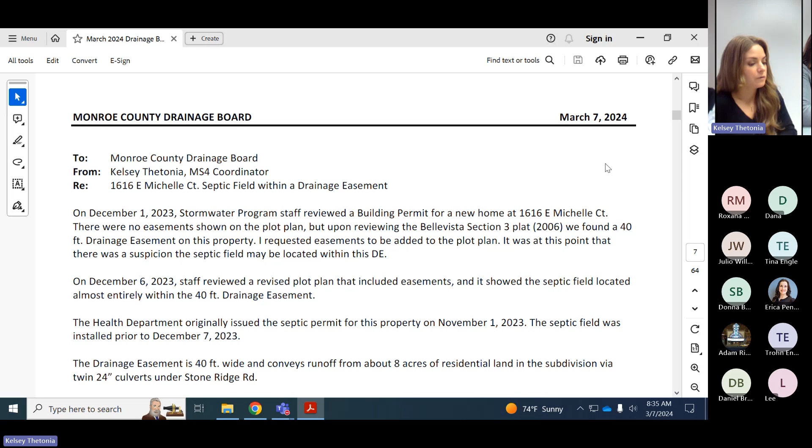So we had to figure out what to do with this septic field and the drainage easement. Obviously we don't want surface water flowing over your septic field in order to protect it and for its longevity. The way that I want to look at this is for the drainage board to allow the septic field to remain, pending approval from the health department, to make sure that they're okay with it. And we would move that drainage easement just south to the property boundary.

Okay, go ahead and pull it up. Yeah, well, it's here, I have some pictures I'll show in a second. Basically, we're going to be just shifting the drainage easement to work with the land here.

So it doesn't drain a huge area, about 8 or so acres. It's a big hill across the street here with just one other residence uphill from here. We also have drainage from the north as well, a bit more residential area draining to this. We have two 24-inch corrugated plastic pipes going under Stone Ridge Road, as well as two 12-inch culverts from Michelle Court to the north. They all meet in this area, and the surface water flows from east to west here.

So I believe when they installed the septic field, there's kind of a flow path that goes outside the easement area to the south here. So again, the 40-foot drainage easement was delineated with the plat, I think assuming the lot would be mass graded or something like that. But if we can move that drainage easement boundary farther south to cover this flow path here, the septic field itself, to me, doesn't look like it poses a huge obstruction. It's more for the longevity of the septic field.

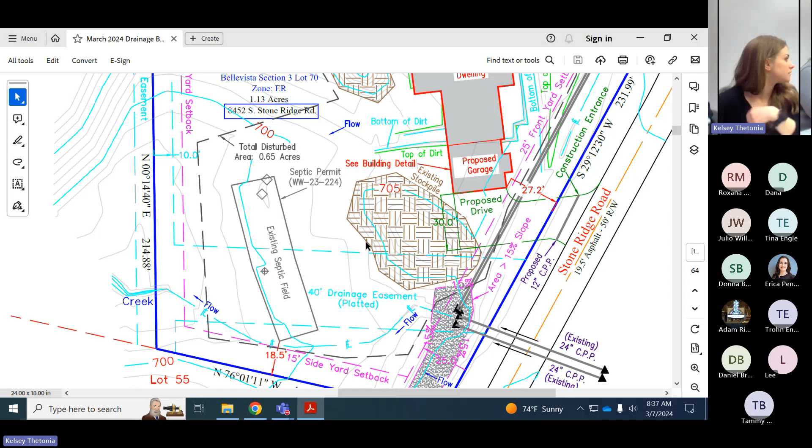Yeah, so it is accurate. They had Deckard Land Surveying complete the topo so that we could determine the distance between the septic field and the property boundary and see if we had enough space to convey surface flow. They had proposed potentially encapsulating this ditch in order to get it around the septic field. But it's tricky because we have two sets of twin culverts to connect, and it would be tricky -- build a box around it. It would be a very big box.

And just with the easement, just south of that -- would a portion of it still cover that septic field? It would still cover the septic field. I would envision just extending this line to the property boundary, so we cover this whole area in the easement. So the septic field would exist in the easement, that's what I'm looking for your permission for. Okay, gotcha, you're not moving that northern boundary down necessarily. Mostly because we only have 18.5 feet between the corner of the septic field and the property boundary, and that's not sufficient according to how we would normally size an easement.

You've got pipes routing over to that ditch -- four of them, yes. So this is what it looks like, these two 24-inch pipes. They're not exactly close together either, so if you were to encapsulate it, it would be a very large box.

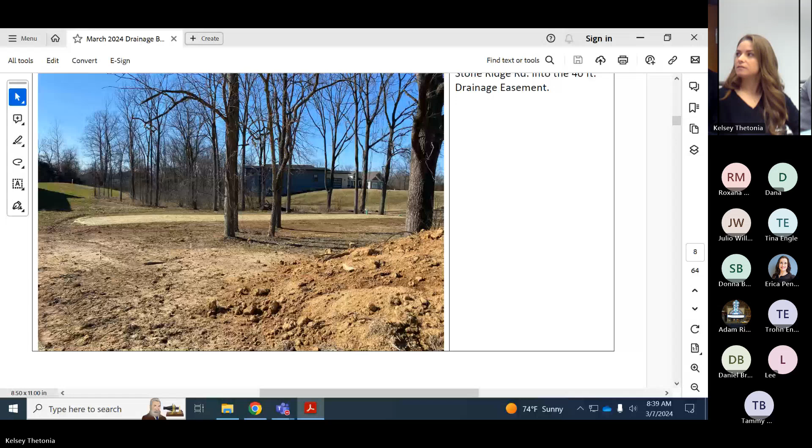Did the fellow dig that ditch already? There's a little bit of a swale, it's very minimal, but you can see the water is going around the septic field to the left here, flowing to this wooded area this way. And this stockpile will actually be moved as well.

So the home was just recently built, or there is no home? They're waiting on their building permit. Okay, because I'm looking at an area with no structure.

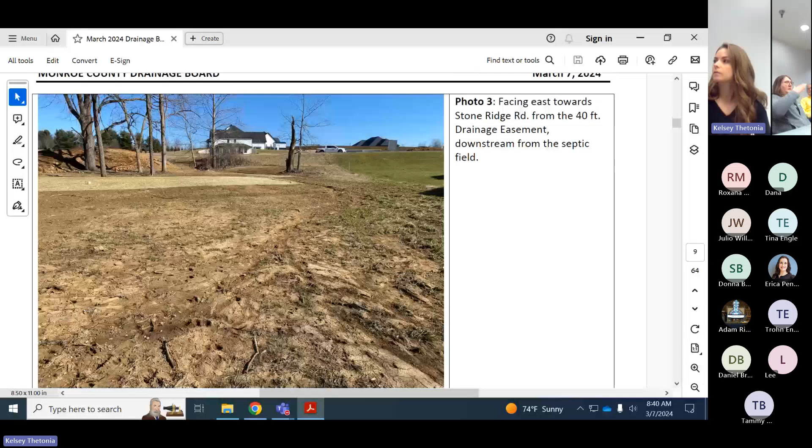Yep, I will highlight. It's not actually on the septic field, it's about 10 feet out, but it would be -- I can get that for you, basically like this. And then there'd be some drainage outlets.

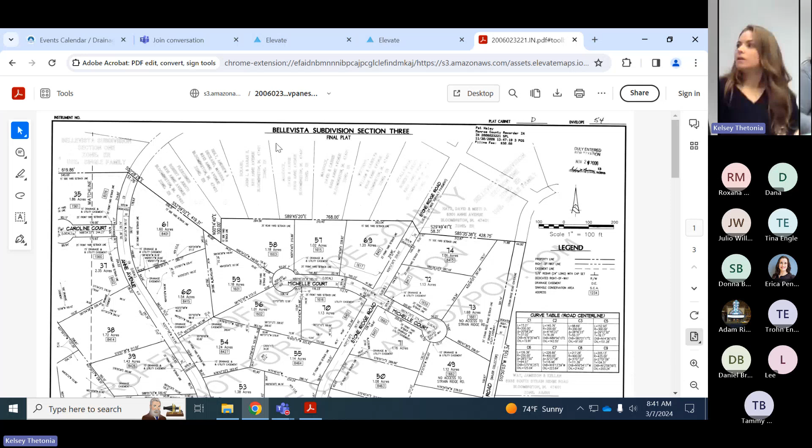Erica, I was working with them on their SWPPP, Eric Deckard is doing it. I think we could ask that they maybe regrade some of that area -- what kind of longitudinal slope does it have? Sorry, John had asked that. So they're lot 70.

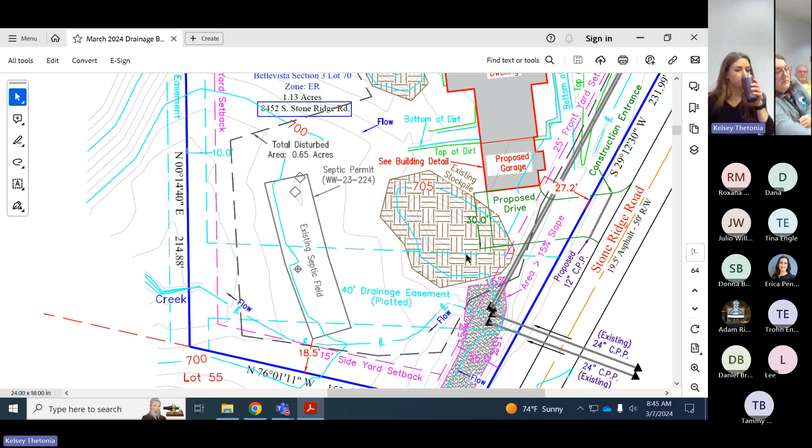Was there any... do we know where those boring points were? Yeah, I have GPS readings for all of them and a couple of maps. Do you have a map? Okay, that would be great. And then, I guess, when was this installed? Is it a new installation?

Yeah, okay. And what are the Presby folks doing, you know, when they're installing this - are they not looking at the deed? I mean, they should be. I understand that maybe a common person coming in not interpreting it correctly, but that's a little outside of the after-the-fact situation, but it's really important to me to understand.

Well, the 1, 2, and 3 - so the 1 is where they're proposing, isn't that where it looks like it was kind of built? Yeah, 1, 2, and 3 are the soil borings where they did it. The septic field was placed in that area. Okay, so they were following also where the suitable soil was.

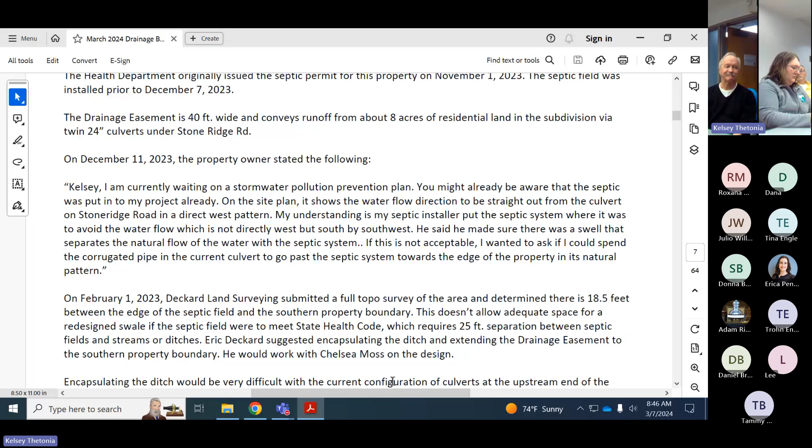Yep, so then the drainage easement was just put there, and then somehow that communication gap had to exist, because I doubt they're going to propose an area where that easement was. Okay, this is helping a lot, thanks. Seems like the easement was there before they did the septic. Yeah, what came first, the chicken or the egg?

Well, probably the platted easement, I think. Yeah, definitely. But was it just a poor, indistinct map? It's difficult to read. I would have thought the combination of health department things would have caught that, or they were just going off of what was suitable soil and where the borings were done. It was kind of a combination of issues.

That's where the soil borings were done and it was considered suitable as far as soils go. During the inspection we just didn't catch where the easement was because we hadn't seen a map of it. It's kind of our bad for not catching where the flow of water was, but we didn't see it on site or on the map, so there weren't any obvious signs of drainage through there.

Is this not significant? I mean, there's 4 pipes, but is there not significant concentrated flow? From what I can see, there isn't a distinct stream at all here. It's just... what's the watershed for that?

So the watershed for this goes about up to Strain Ridge Road. So we're talking the parcels right here. It drains this area up here, and Strain Ridge comes around. It's basically just a subdivision, then there's a break in the watershed and it comes down. So it's just a handful of lots here that drain, as the 2 or 3 or 4 other lots get developed.

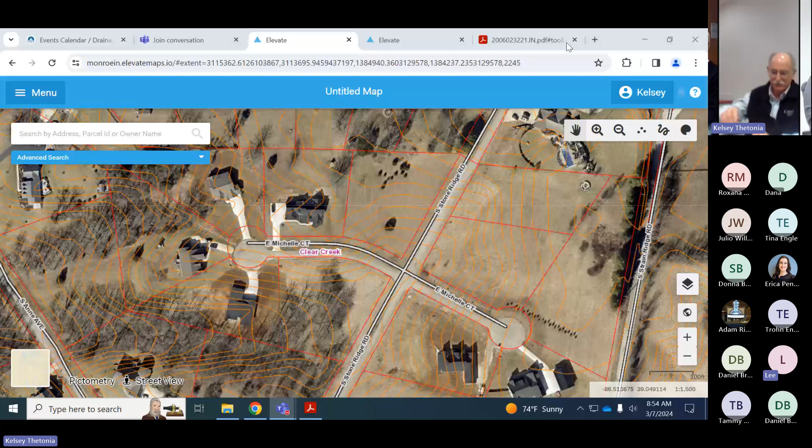All right, thank you for coming in, and thank you for helping to explain. Appreciate it. Yeah, thank you. It sounds like it was a learning experience for everyone, I think.

Thank you for inviting me, Kelsey. Yes, no problem, we'll be in touch. Nice meeting you guys. Thank you, Eric. Can I also say one last thing? Thank you for the approval of the waiver. It's tested my patience, but I see the process, and I really appreciate all the help you've given me, as well as Eric, she's been helpful as well. Great, thank you very much. We'll be in touch. Thank you.

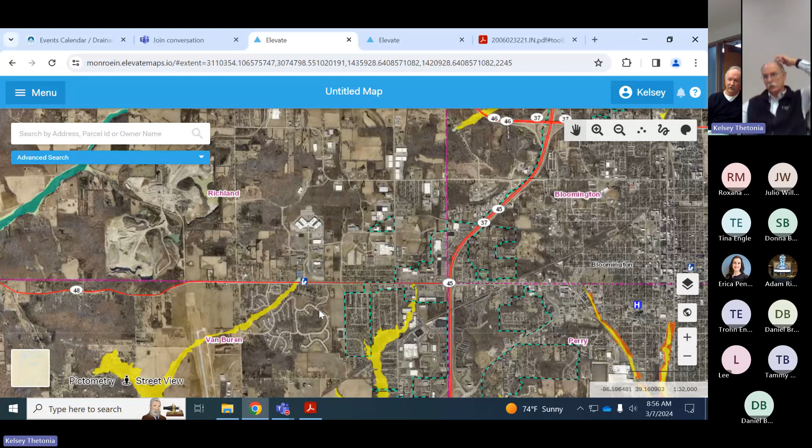I hate holding up building permits, but this was a good catch, and I think it needed to be addressed. It'll enhance the collaboration between health and stormwater in this area, which I think is very valuable. We're having discussions on the new stormwater permit and procedures and OpenGov permitting, who's going to be reviewing what, and the order of operations for things. This is a perfect example of why we need a bit more review of wastewater permits before they're issued, especially in old platted subdivisions that have been developed for almost 20 years. Not that we need a say in everything, but just so we can at least look at drainage easements.

Well, as long as there's a better map, I think that'll help a lot. Okay, so the next project, we have the engineer on Teams. This is a project on federal property, US Postal Service. They're doing a property expansion on an existing facility here on the northwest side of town.

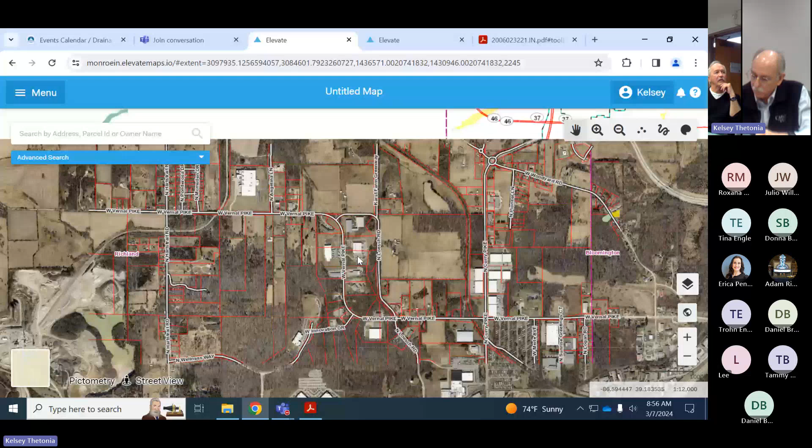So this is located in the Jackson Creek Critical Watershed. This is Vernal Pike, I-69 here. So it is in an existing business park, Northwest Park. This business park was approved in 1995, just before the drainage board was formed.

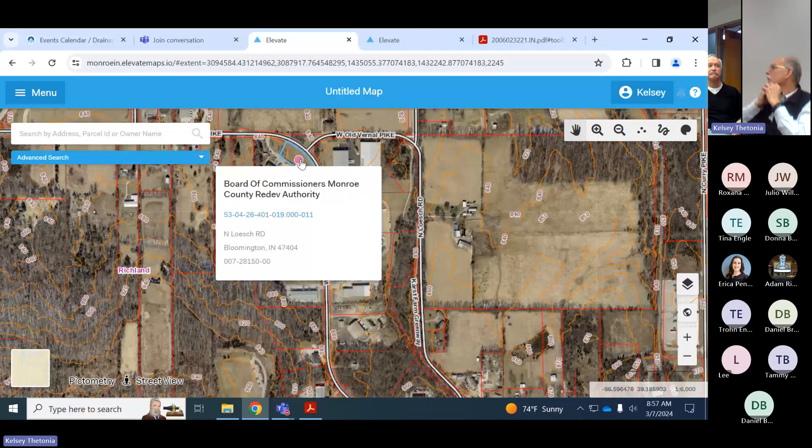So I didn't have any information on drainage in this area. But these lots here, there are actually 5 regional ponds that were created in this business park. At least 3 of them are on common area lots owned by Monroe County. Erica inspected at least these three, owned by the commissioners, last year, and they were in poor condition.

As you can imagine, it was in the nineties, and I think ownership and maintenance responsibilities were probably not top priority at the time. So before this petition came through, it was already on my radar as something we definitely need to address—whether the county should be maintaining these ponds, and we need to have some conversations on who's responsible for what.

The fact that the county owns the ponds would seem like we're going to be involved in it. But to my knowledge, there's no business association, so it would likely fall to the county. So there's no business HOA?

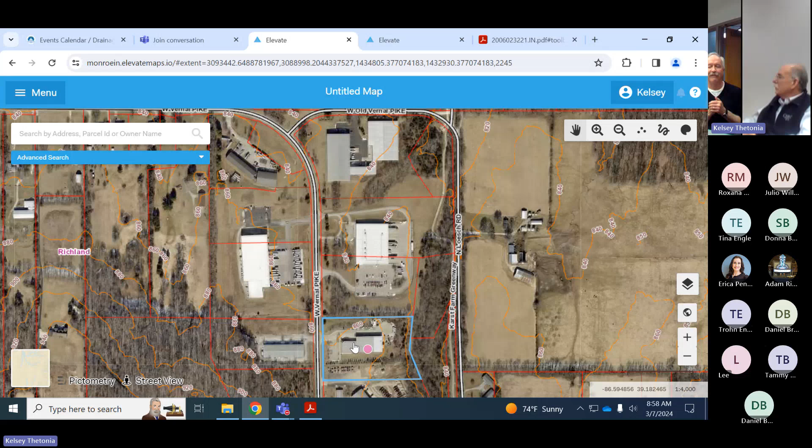No. Could you point out the ponds a little bit? I'm having a hard time seeing them—or are they dry? They're in the woods in the back. Have you seen them? I've walked all of them, and I ran that stretch of the trail that goes right behind it a couple of times.

We're vaguely familiar with that Karst Farm Greenway area that cuts through here. All the ponds are in wooded areas—this one here was just built by putting a dam in the stream essentially. But they all have outlet structures, just in various stages of disrepair over the years. It's all overgrown, so there's some work to be done here, which I was already aware of.

I did receive the original grading plans and detail sheets on the outlet structures from Smith Design—they thankfully were able to pull those up for me. But I don't have a drainage report, and I'm not sure how they designed these basins and what their assumptions were. So, early days—this is pre-drainage board. Unless Terry, do you have any additional information on these? No.

What I was thinking is, this is a proposal for the post office, so can we focus on that one detention area there—let's see what needs to be addressed for this petition. This property actually drains to two of the regional ponds, and they've opted to install their own pond on this property separately, so that they don't have to mess with the regional ponds—they don't want to buy into that maintenance.

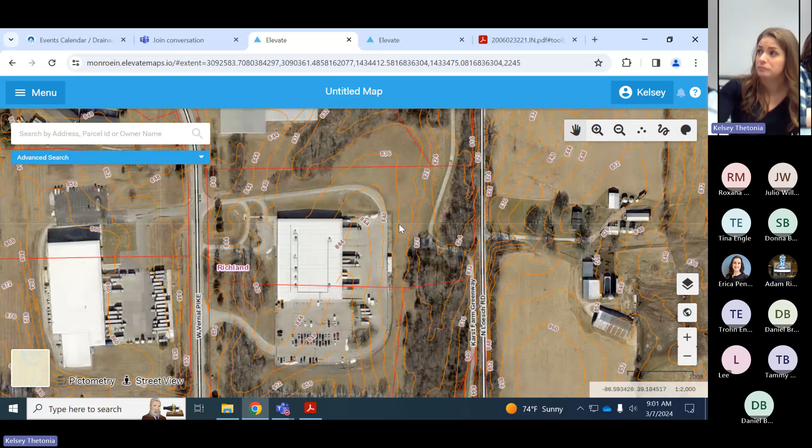All right, so let me give you more information. I gave a summary of the project, and they provided a preliminary drainage report with a narrative describing what they're trying to do here. I'll let the engineer Julio give a bit more detailed explanation, but I have fairly minimal comments on this. I did include a topo from what I had here so you could more easily see the contours.

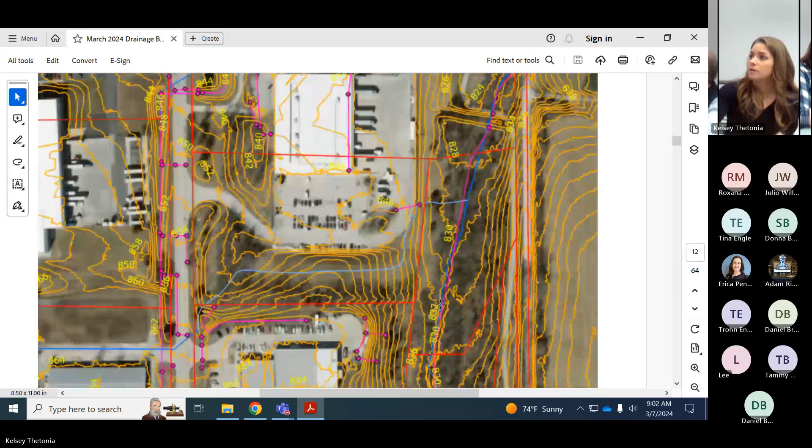I think it's a little more detail than what was on Elevate, but you can see here the regional pond with the dam constructed here. So basically the south portion of the site will go to this pond, then the north portion will go to this pond over here. Both ponds drain to Jackson, and both ponds will eventually join together and drain to the same exact area.

Do you have a layout of what they're proposing, so we can kind of see the additional impervious? I do—actually, hold on, I'm going to pause my share for a moment. Sorry.

I forgot to pull this up. I just received an updated version of the plan that I want to show you—I just got it from Julio last night. While I'm pulling this up, Julio, would you like to give an explanation of this project and your original preliminary design?

Absolutely. Can you hear me okay? Yes, excellent. Thank you so much, Kelsey, for that introduction.

Just as Kelsey mentioned, the post office plans to upgrade their facility. The facility upgrades are made up of some interior upgrades along with some upgrades to the site. As far as the site is concerned, they are hoping to meet their growth demands for employees as well as distribution. So as far as the site upgrades, they're proposing new parking and also to upgrade the parking lot to house infrastructure to charge electric vehicles. That's what's driving the extent of the development on this site.

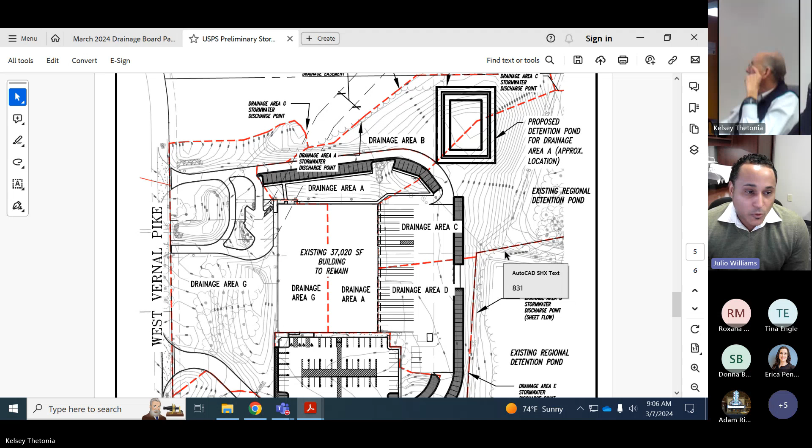So that ideal scenario doesn't work for us. What we're proposing is: how about if we quantify how much runoff the new pavement is generating? In total, that new pavement is about half an acre, and we calculated that for the 10-year and 100-year storms, the runoff is about 7,500 and 11,000 cubic feet respectively. So what we're suggesting is that drainage area A is about 1.5 acres.

Drainage area A is made up of the eastern half of the building, which is all hard surface. It's got that grassed area right north of the building, and it's got a portion of the drive, so that totals about 1.5 acres. For the 10-year and 100-year storm, the runoff is about, let's just say, 12,000 and 22,000 cubic feet of runoff. So we're proposing to treat the runoff from drainage area A, in lieu of providing individual detention for all of the areas we're introducing.

That pond on the upper right is what we're thinking. The pond volume is about 33,000 cubic feet, and it's 4 feet in depth, and we're proposing right now to capture all of that. Right now, the runoff from drainage area, as Kelsey mentioned, is being discharged to that pond over to the north, and it's not being detained at all.

There's a 15-inch line that runs underneath that drive, more like the top right of the building—over to the right more. There's a gap in the parking, in drainage area A, right there. So there's a 15-inch line that flows from there underneath the drive and eventually over to the north to where that regional pond is. Right now, that's not detained at all.

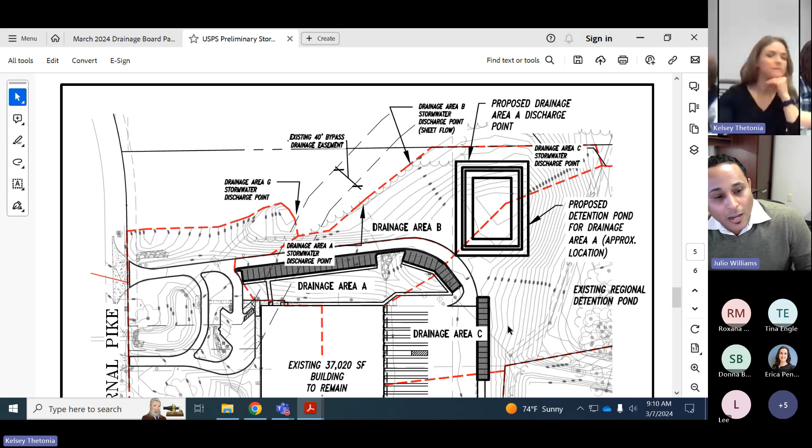So, Julio, it looks like the location of your detention basin is on a ridge. Are you able to get the water into it? That seems like not a very good place to locate it.

I know the site's restricted. So the thought was it would require some earthwork, some removal, just to make way for the pond. We do have, it's almost like in this case, pick your poison, right? This is almost the least toughest of the potential solutions. We do have enough fall from drainage area A to reach that pond, and then eventually release it. But yeah, it would require earthwork to make that work.

Ideally, we wouldn't have to detain anything, but we won't get that wish, I'm sure. Okay, strictly, if you're moving that dirt, do you know what the bedrock situation is up there?

So we have borings. You see where that parking area of drainage area C is? That northernmost parking stall, right there, yes. We have a boring there that's 10 foot deep, and it shows that the material is good, gravelly type of material. So they didn't encounter any bedrock in that boring.

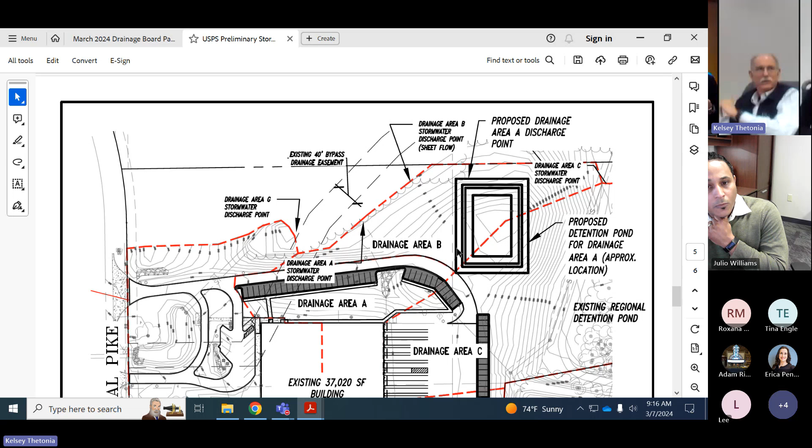Well, we don't know the basic design criteria or assumptions for those existing basins. The other thought is that they are draining to the same location ultimately. Do we even know what size pipe it is?

I have the detailed drawings of the outlet structures. They are actual outlets, not just like years ago where they threw a pipe in the ground and called it a detention basin. No, there are very large concrete outlet control structures.

Let me get something clear with Julio. Julio, did you say you are going to detain the 100-year storm to the requirement of the ordinance or the drainage basin? Yes, with the 2.5 inch, we can meet the 100-year release rates for that drainage area A. You will be detaining it to offset from 0.9 down to 0.45 peak discharge. Correct. Okay, I misunderstood what you said earlier.

I apologize, I missed, what was the result of the soil boring? 10 feet, 10 feet of overburden, unconsolidated something or other.

I don't know, did they go to rock? Did you go to rock? That's what I want to know. It did not hit rock in that boring, that 10-foot boring that they pulled. Oh, they just stopped at 10 feet then? Correct, yeah, didn't go to refusal.

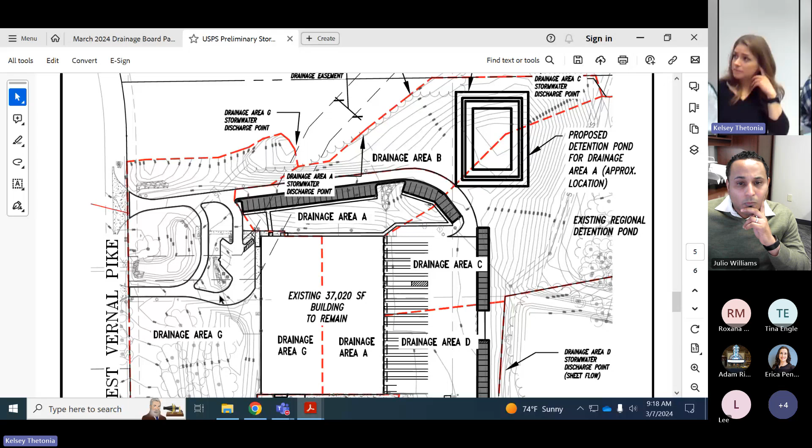Didn't you, Julio, did you say you reviewed the old drawings? Actually that was Phil, correct. Yeah, the old drawings, which I can pull up and share my screen if needed. The old drawings show that to be an area of stockpile. You're welcome to share your screen. That's okay, give me one second.

What would the base elevation be then of the design pond in relation to the surrounding pond? Sure, give me 2 seconds. Let me put up the old drawings, and then I can answer that question.

Have you talked about the maximum storage depth, that kind of stuff? That was the report I just got last night. He said it was 4 feet deep, but for the 100 year it was 1.9 feet of storage. The basin's 4 feet, but he's only storing about 2 feet deep.

So as small as that looks, you may be just trying to stack it up 4 or 6 feet deep. That would be good. I think it looks pretty schematic, doesn't it? I know that. That's why I said I wondered if you talked to him about that when he gets into it. Yeah, I just got it last night.

Let me see, they want to pull the drawings open right now. So 842 is the highest peak right here. Say that's 840, I go down to roughly 836. Would they be excavating? The bottom of the pond elevation that we're showing is 832. 832, okay.

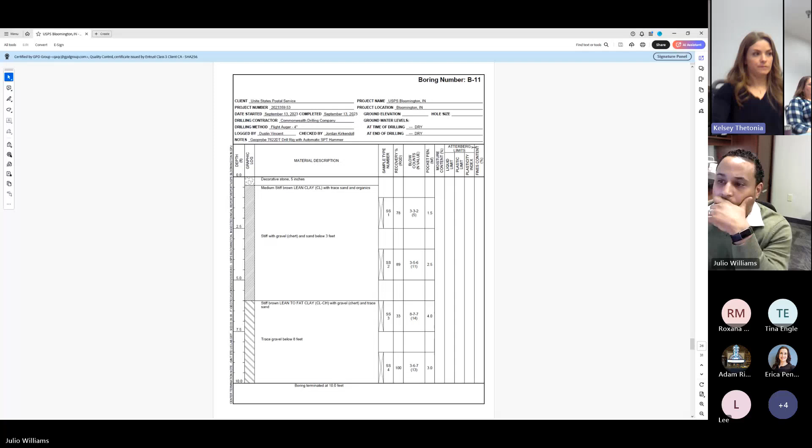Yeah, in your direction, a couple borings just outside the footprint of the pond, to make sure there is enough native soils. And then if there's not, well, then there might have to be some engineering to protect, some lining or other technology to create that reduction in flow.

Now, what if before we require borings, we look at this original - Phil had a good point to check the datum, make sure that if we're talking feet here, how many feet of difference, so we can make sure that it's all being compared properly.

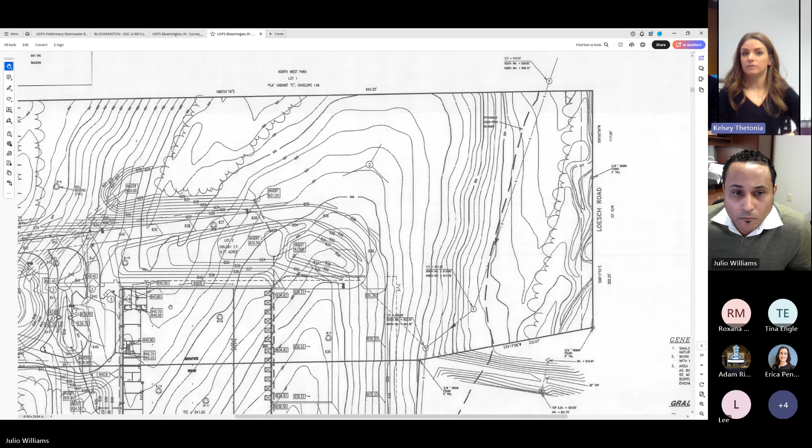Well, the contours you're showing, is that a topographical survey or is that generated contours from LiDAR? This should be a survey. Let me go - that's accurate elevations. Yeah, we just need to make sure that it's accurate.

Okay, yeah. Okay, it's 9:25. That's not - was that?

What would be just an approval of this preliminary drainage plan? Yeah, no, yes.

Before, I was just curious about the process on this. Is this after drainage board and everything, does this actually make it through any other process as far as planning, or is this all done administratively? Site plan, okay, because sometimes when we have looming thoughts on certain things, it goes through the plan commission process and then comes back here. So this might be one of our last real times to address this. So I just wanted to make that comment.

Yeah, I think Kelsey will bring it back to us though. Yes, I'm not saying she doesn't do a great job at doing that, just, I was curious if it shows up again. I can bring it back to you if during plan review we find issues that I think you'd be concerned with.

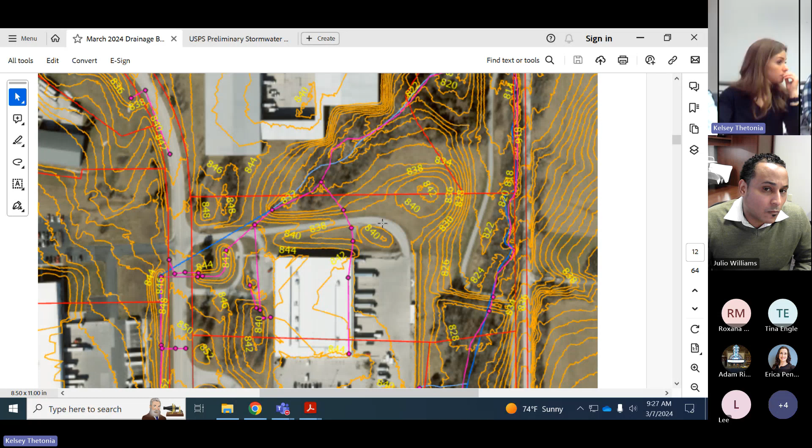To remove that influence even further away. And that would be a lot lower cost solution, right? It would be, taking a look at it more at that level that you're going to. Because there's that drainage that goes down right through there. Just an analysis of the stream channel along that drainage would allow you to see what the inherent material is through there.

So you go from 832 down a couple contours and you'll be able to get a good idea - if you've hit bedrock, you're darn close. If you don't hit bedrock, you probably have plenty of native soil. So there's a lower cost way of doing this without having to actually do a boring. And borings actually would compromise the system more than not doing boring. So an inspection of the drainage way, looking at 832 and a lower geologic survey of that drainage would provide all the information needed.

Yeah, okay, that would be what - okay, so you'd have a geotechnical engineer do that, is that right? A geotechnical or a geologist. Yeah, there's probably some professional geologists out there.

So from 832 and lower elevations, observe whether there's bedrock in the drainage way, and at what elevation, because you just want to make sure there's enough native soils above the bedrock.

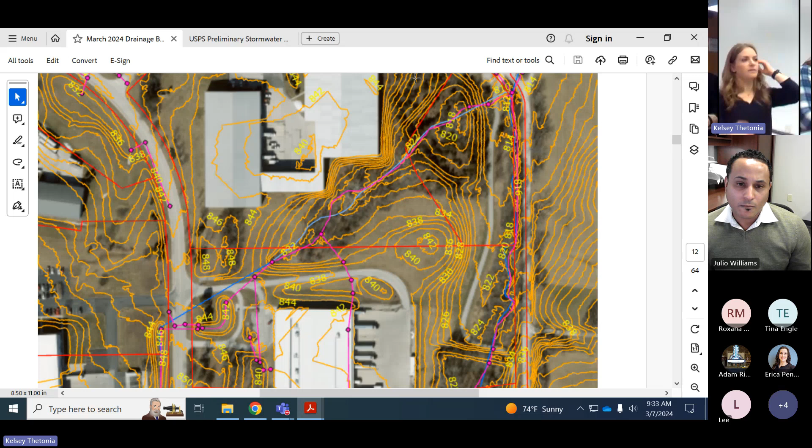Okay, okay, very good. Yeah, that would be the way the ordinance is.

You could recuse yourself, I believe, or vote present, or abstain. I think all of those are fair, because we have an approval with the quorum present. So you can abstain or just vote present. I think I'd like to vote present. Okay, very good, very good.

Thank you, Lee. Well voted. All right, Julio, I appreciate your time. Thank you, I will be in touch with you to go over the plan and look for your final drainage plan to review. Okay, sounds good, thank you very much. All right, have a good one. You too, nice meeting you.

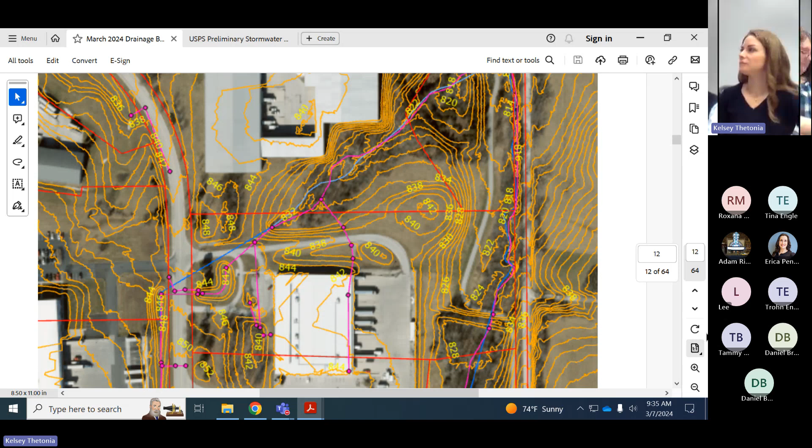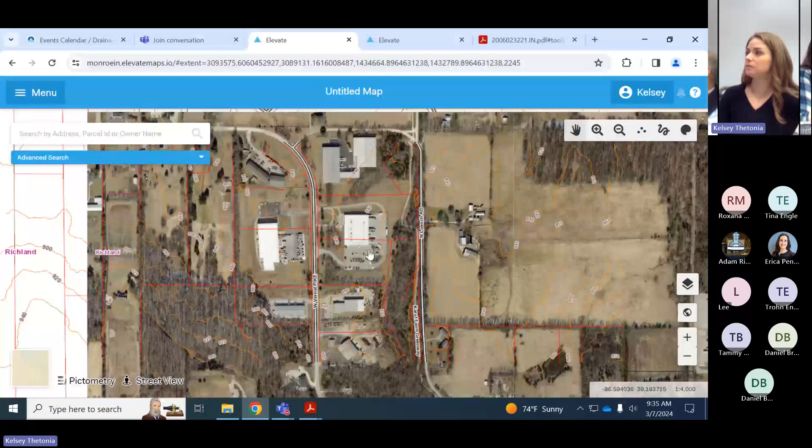So this was platted a long time ago, and there are some drainage concerns with this new roadway connection. It's in the Jackson Creek watershed. The drainage area is about 224 acres in this area. So I'm gonna pull up Elevate so I can zoom in a little bit more on the topo here and show you where we're at and the lay of the land here.

So we're on the south side of Ellettsville, it's the State Road 46. This is Jackson Creek here. So all these subdivisions are located in the county. Everything's draining from south to northwest. This is the town boundary of Ellettsville here. So this new subdivision...

...was approved by town of Ellettsville in 2021, I believe. So this roadway connection would basically connect this subdivision here, Westbrook Downs, this North Brookwood Drive, to this new subdivision here, allowing access for these two subdivisions to connect here.

So this is a fairly steep area. Like I said, the drainage area is 224 acres, give or take a few. And there's this stream that runs in the rear yards of these homes, basically bisects Westbrook Downs.

Through here, so it's fairly steep, but so you get an idea of what's around it, mostly residential. And then it all comes down to this one area here. So we have an existing structure under North Brookwood Drive, it's shown on the plans, and there's an existing riprap ditch along the roadway here. The proposed right of way is just south of, well, the existing road right of way is south of this stream channel here. It is gonna be flowing to a structure that's been installed under this new roadway as well.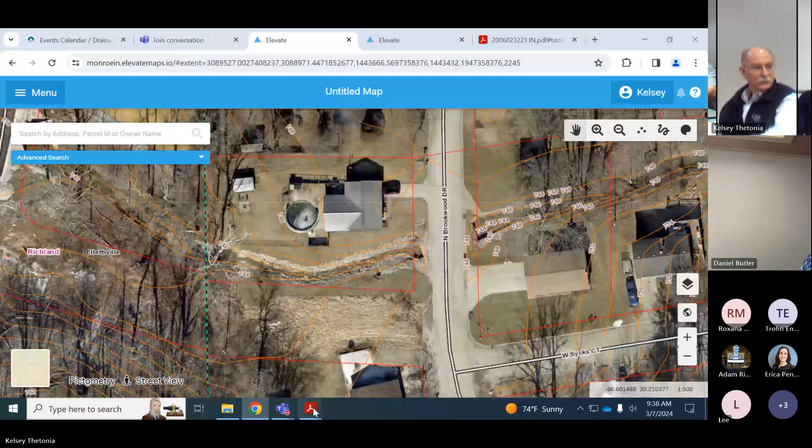Okay, so we got Chelsea Abram to run that model for us. It's pretty, it's like a spaghetti bowl down there where all that is starting to move, in the west. Had a very good day. So you see storm drains coming into that from the southeast. You see that big box coming from the grid, from the east.

So there was gonna be some pull downs on the HEC-RAS model that needed to be massaged. It took more time than I had to devote to it, so we've got Chelsea to do that. We turned in her report, I think it's part of his package. It's like 100 pages here. So yeah, I didn't include all of it.

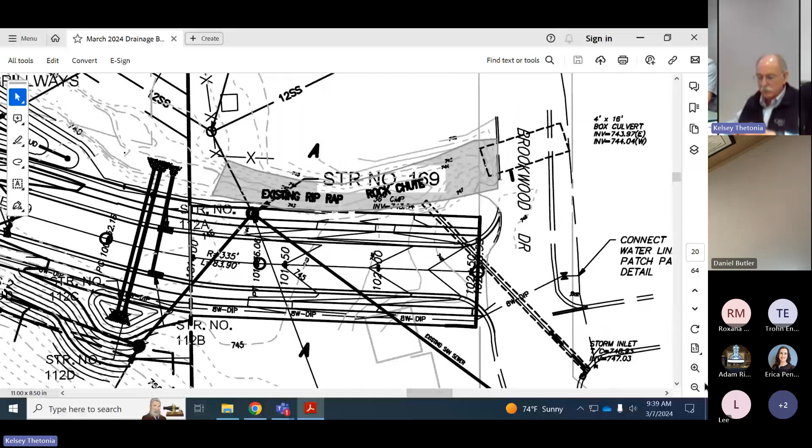Yeah, and my thing, the top page is the bottom line of her report. So for those two intercepts, that's the P25 low water surface elevation right at...

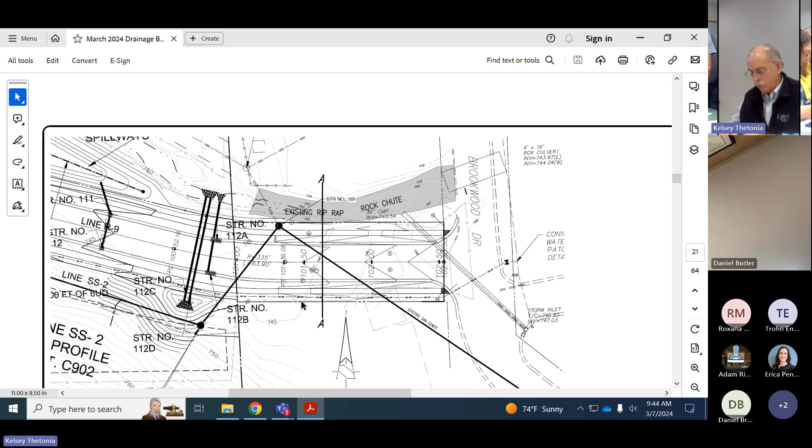Okay. How does that relate to these two floor plans? The existing units, you got about a foot clearance there. For the houses in our new subdivision. The existing homes in Brookwood. Well, there's no existing homes there yet, this is the new subdivision. Oh, I'm sorry. No, these two homes. Okay, yeah, I'm with you.

More built up, more impervious, more built, and more increases in frequency, duration, intensity. So what, I guess, what are we being asked to do?

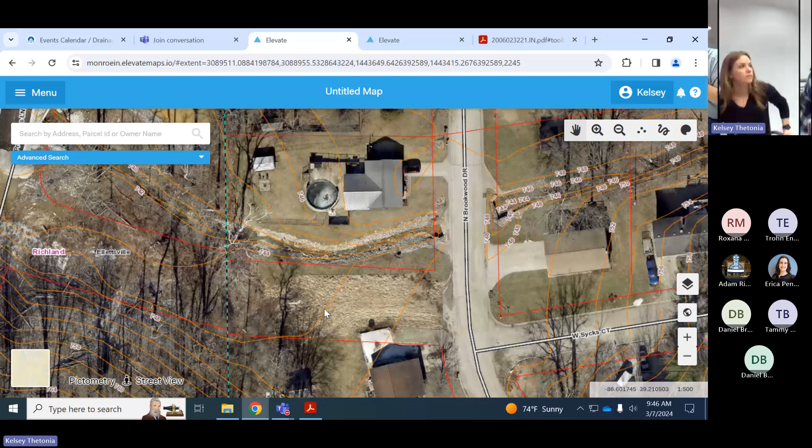We're looking at whether or not we will permit this roadway connection based on whether or not we can handle the drainage in this area. Yeah, actually it's the increase in flow caused by our road.

A 200-foot stretch of road is 30 feet wide, for a 200-acre basin, is rather minimal. Okay, I have another question.

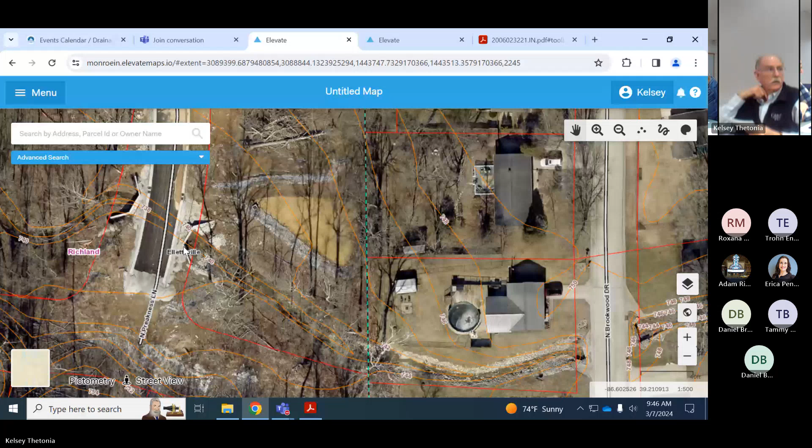This culvert is here, your big box culvert you put under your road. Yes, yes. What was that designed for? I have to ask John. Just show here, structure. Yeah, I think it is, it's...

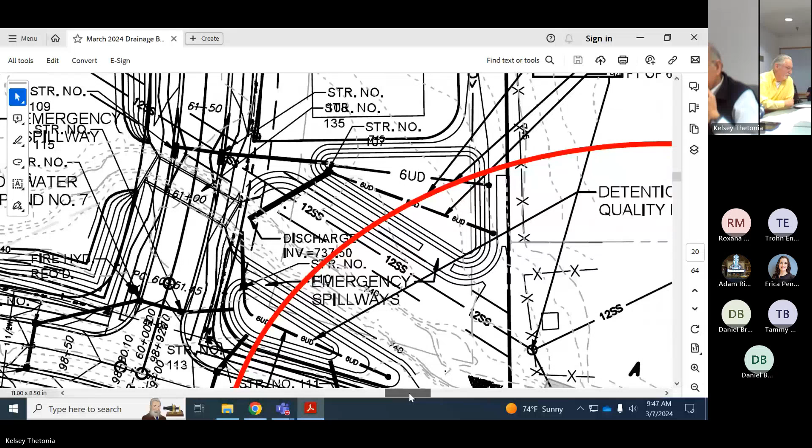This one, 12, 15, what's that, what's the number there? 61, yeah, 61, too small. 61. Yes, just up the page, so previous page or something, stack of them up here.

Okay, Kelsey, I have just a couple things that need to be looked at, the sections back here. It looks like you've got just right at 2 feet of freeboard. I'm going to assume that Carrie's gonna look at this a little more in detail. Yes, I don't want to get into it, but that would be one thing I would ask about, either Carrie or another firm, I haven't decided yet.

Okay, this culvert down here, I thought I caught where it was designed for a 25-year storm. Yeah. If that's the case, I think the model needs to look and see what the impact of the roadway has for the 100-year storm, because it will probably overtop the road then, and that's gonna have a backwater impact here.

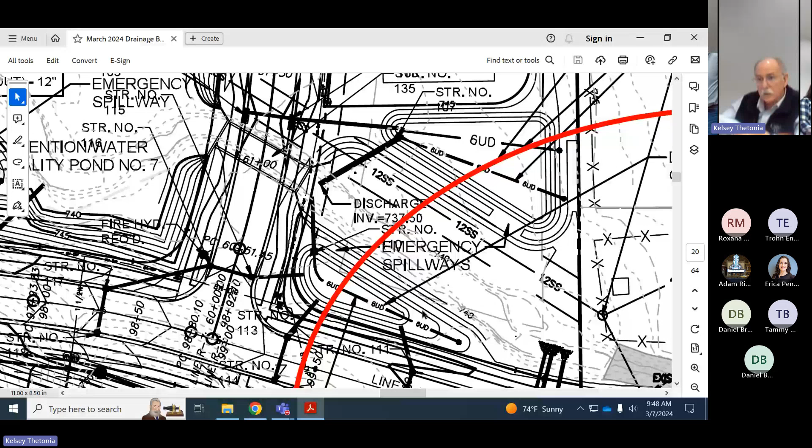The first question is about it encroaching here to the stub. That was my concern. So there's an intermediate flow, right there where they're proposing to build the road, right? Or at least that's what I'm seeing with the delineation from the state inventory.

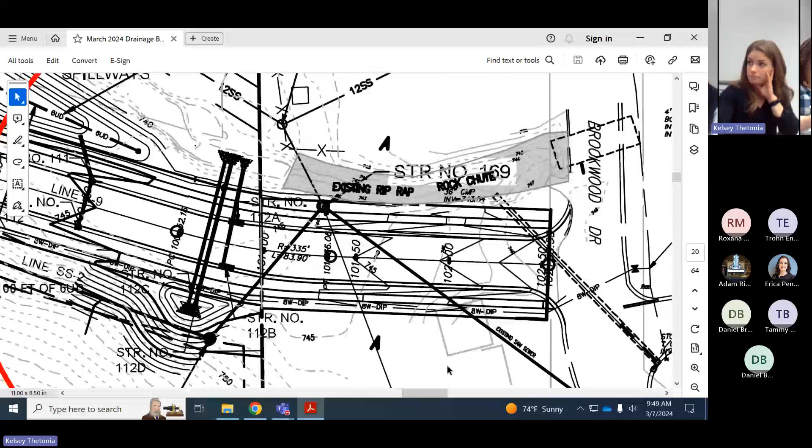The NWI mapping shows it going straight through that connection part. There's also a drainage area you can kind of see just a little to the left right there. And then on the south side of the road, there's a stormwater area as well, so there's a lot going on here. Obviously, I'll defer to the experts on whether this is something of concern.

So that's what you ran there. We can ask them, we'll do appropriate permitting if we get to that point. Well, I think creating connectivity is very important. To Terry's point, we don't want anything to overtop the roadway. So I think there's probably a doable situation.

I'm just bringing these up for considerations. Can you clarify that we will not allow the roadway to be overtopped in a 100-year event? As far as I understand it, if you design the culvert for the 25-year storm, that is in accordance with the ordinance. Some roads are going over top in a 100-year event.

I think the key there is you have another access point, right? Well, that's Ellettsville right there, this is Ellettsville. So there are two other ways for these residents to get out of their subdivision — they have to go north, otherwise they have one access point to the highway, and that's over a 60-year-old concrete bridge.

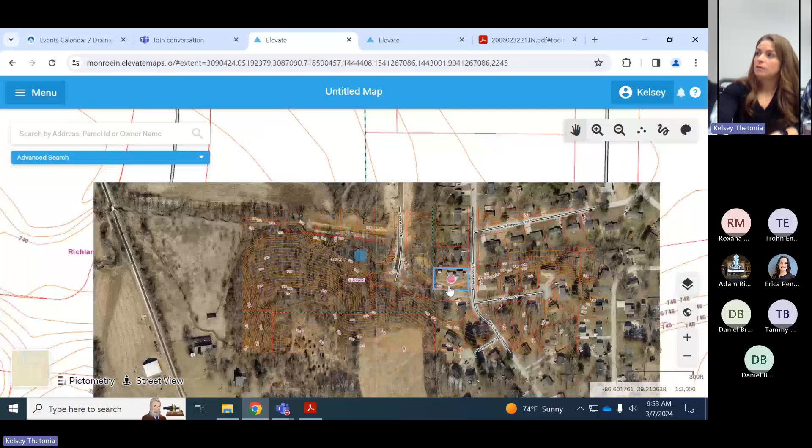The whole thing's going to be impacted. And that new stub to make that connection is encroaching on that channel. I'm concerned that's going to back up the backwater even more. I thought it was south of the channel. Well, it is, but the north embankment of the roadway is on the channel edge — it's going to be right up against it.

Well, you know, actually the roadway runs down the storm drains to our culverts. It's not going into the channel. The roadway is a break between the 18 acres and the rest of that.

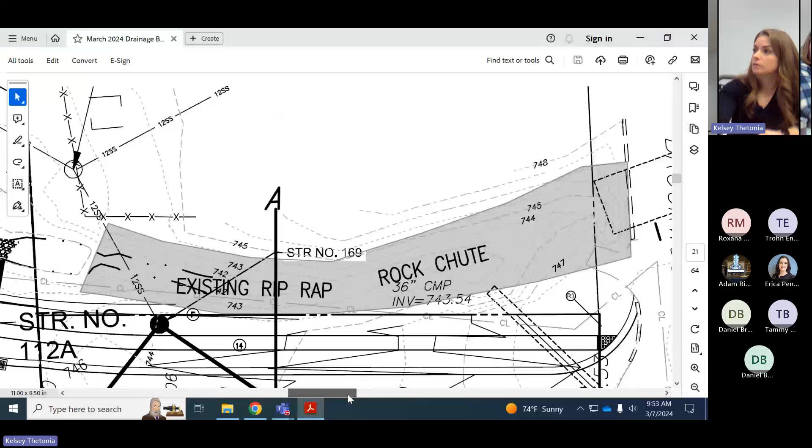Kelsey, zoom in on that, see if they've got proposed contours. And how far out does the front slope of the road extend? So all this water is getting intercepted by these storm inlets and dumped into there, which is designed for the 18 acres at a 25-year storm. So all the water from this roadway will be handled — it's not contributing to the riprap.

All I could do is back up. Right, yeah. And the tailwater from that culvert we designed as part of that report is like two tenths, something like that.

Okay, that's not an easement, by the way. And it can't be improved much because that sanitary line is there. At least I looked at the possibility of bringing that sanitary around so you could do that, but there's a lot of longitudinal slope on that.

Last year when we had those two big rains—was it last summer, two summers, 2021—I went out and took video. It was just roaring, but it was not outside the bank of the riprap. This was flowing down this side, that 18 acres, and I got video of it flowing in the street.

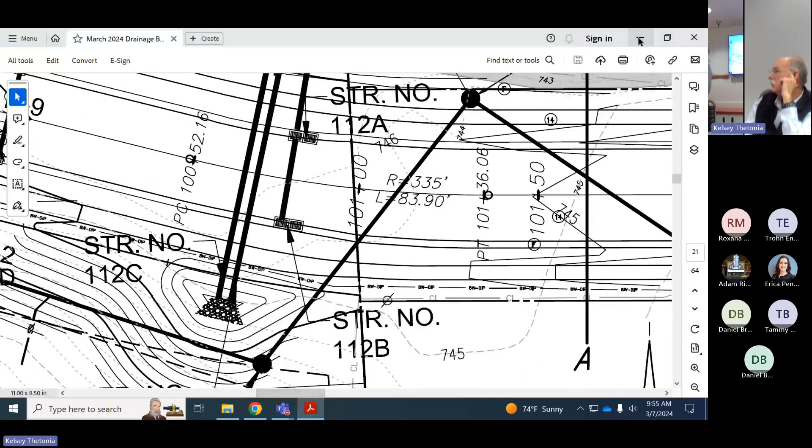From Brookwood all the way down to this low spot. Now, was that before this structure was put in? Yes. That's where it's running now. This was put in 2022.

So before the structure was in, this channel could handle approximately that 100-year event. Now this was sized for the 25-year. Yeah, that's what Terry remembers, I don't know. We can confirm that.

My question for the board is whether or not we want to allow any road overtopping in this connection, because each subdivision only has one point of ingress-egress to State Road 46, and both of them are over bridges and floodway for this same tributary.

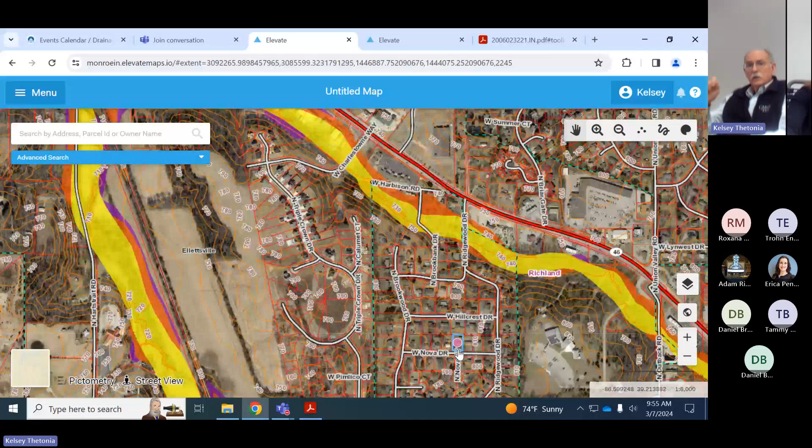If engineered correctly, I think the connectivity is very important. Yeah, I don't know if that gives you an answer to your question. No, it doesn't. What happens if one of these bridges to the north goes out? Then you've got to go way out the other way.

I don't have information readily available on these two structures here. But your question is, are we going to allow overtopping of this road? Basically, yeah. And since this is the emergency exit for a scenario where there's definitely water, it seems like that would be ill-advised, if the whole point of this is to connect and allow for egress, ingress.

Do you have any history on this, about the existing structure in the east subdivision—this home, or, I'm sorry, under Brookwood, the culvert structure under 46—has that ever flooded? You know, I haven't seen it, but it looks like it.

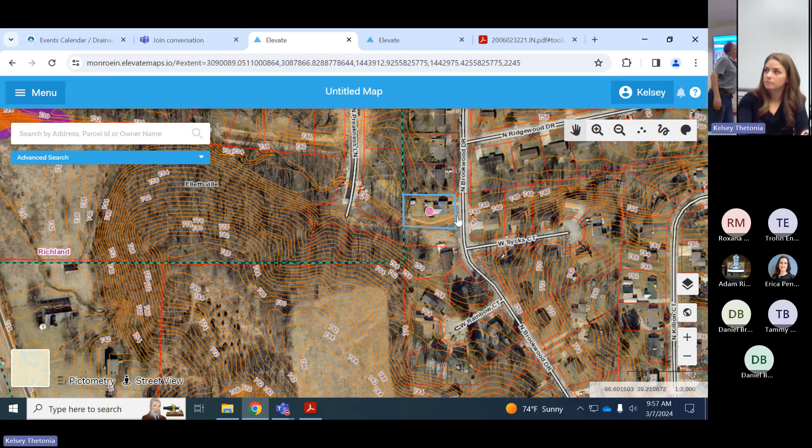They actually added, after the fact, two HDPEs on either side of that box culvert, and I don't believe one of them's even catching anything. But it looks like there's probably been a problem, or they wouldn't have done that.

That's one, yeah. That's something we would know. Maybe there's some data out there on frequently flooded roads. No, but we would have put in the extra pipes if the street—I don't know, you guys are the department. But really, that's kind of where my question's leading: have we talked to highway?

Let him answer that. Okay, I second that. So this road is going to be dedicated to the county, right? Most likely this little piece, potentially, yes, and so it'll go into the road inventory.

So what has highway communicated to us about this, especially about us considering it being overtopped? What's their opinion? I don't know if I saw anyone here, but I'm really curious about that. They're not looking at drainage, they're just looking to see that it meets our standards for design. Yeah, but if it overtops occasionally, the infrastructure is going to wear and tear more, and the maintenance of that road might be affected. I'm just curious what their thoughts were.

Leave that to Carrie. Okay, so you're saying let Carrie evaluate it and see whether it's going to overtop, or verify? I would say let Carrie look at it and give feedback to Kelsey on any issues with their design, knowing that your ordinance says they've got to design it for a 25-year storm, but you've got to see what the impact is for the 100-year.

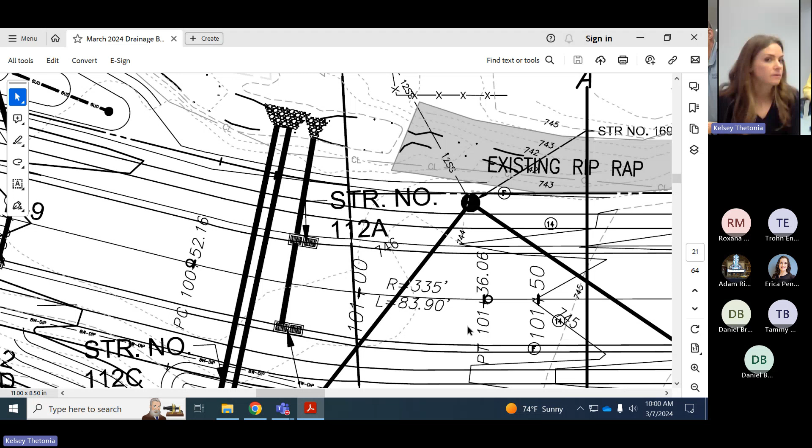I think that, well, you said you didn't know exactly who you were sending it out to, so until Kelsey determines who she wants to send it to, we have two on-call contractors to help with the review. We leave that, so you still have the discretion, it doesn't seem like we're fixed on one thing. I think Christopher Burke Engineering could handle this review, they have enough engineers on staff. I just want to run it by them first because it's different than what I normally take, this is more involved. I also have on-call contracts with Clark Dietz, HNTB, and other engineering firms who have offered plan review services to me, because I'd leave it to Kelsey to determine and make sure it doesn't look like we're committing to use one particular person. I will run it by Christopher Burke Engineering first since they know our ordinance.

So I make a motion that we have Kelsey send it to third-party reviewers for assessment to ensure overtopping isn't a concern even in a 100-year event, and if so, then bring back to us for further discussion.

Is that my motion? Well, that's my- before we, Tammy had something to add. Oh sure, if you don't mind. Wait for her, thanks Trohn for seeing that hand, please.

Just real quick, because I'm looking at the 1977 plat, and there is that 60-foot right of way, I don't see any drainage easements on that plat. Do you know if any drainage easements exist for that area north of the roadway? And would you be just obtaining that out? I just want to confirm about easements, and then also...

Planning wouldn't require any kind of grading permit within that right of way, but any work that would be done outside of it within our jurisdiction would probably require a grading permit. I would ask for, since it's not the highway department doing this work, a grading permit to cover all the work on this roadway extension, so we have a way to regulate that, and the highway department will need to decide if they take it into their inventory, if they need to be able to determine that it meets our standards once constructed. So should that be part of our motion?

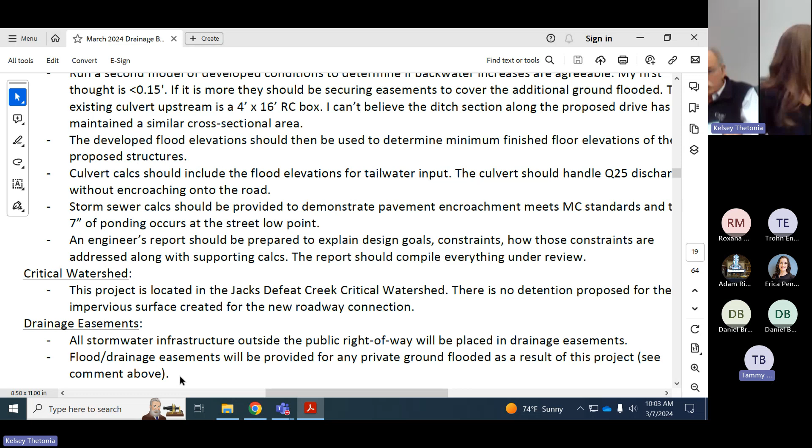Okay, we can add that to the motion. Yep, if you'd like, and also to look at the finished floor elevations of the adjacent homes. What she said. Okay, thanks, Kelsey. Thank you, Tammy.

However we do it, let's just make sure Donna has it straight for the minutes. So, okay, the motion is to send to a third party for review, to look at the current situation along, at the 25-year flood, along with an assessment of the 100-year flood, to see if overtopping would occur, and to add drainage easement requirements for the adjacent properties, and if necessary, a grading.

Right. It's my guess that it's encroaching onto that lot to the north. There's no easement now. If whatever they do changes that, then they're going to find themselves in a position where they've got to negotiate an easement to cover the additional encroachment. But can our design get by, if our slopes stop before it gets to the easement line? I understand that.

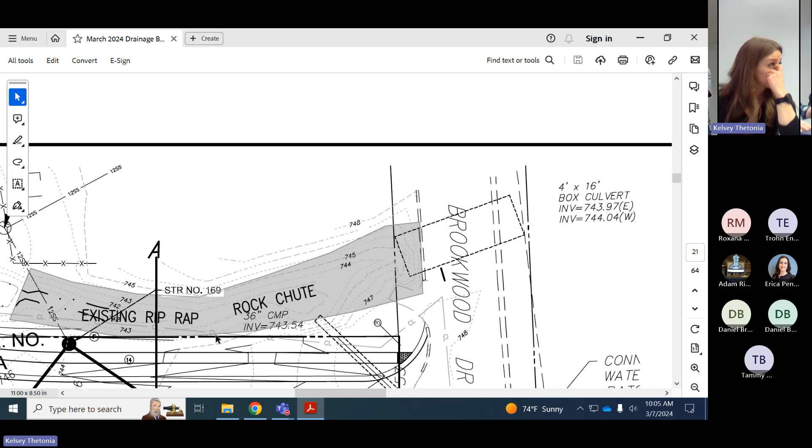They're talking about right here. I mean, I would at least see, like, a temporary permission, at least during construction of the roadway, right? Will you need temporary permission at least during construction on this property owner right here? Not if we stay within the easement, not if we stay within the right of way. Jerry's concern is the water is increased up there, but we have tailwater numbers for stations all along that riprap channel.

And it's in this report, at my point there, where that 18 acres comes in through those twin culverts, it's like a tenth the tailwater, so I don't think I'm impacting that riprap channel up there. I'm going to say let Kerry cut it. Yeah, okay.

Okay, if you need a copy of that preliminary or the final plat, I've got that on hand as well. So thank you, Tammy. I can share, but yeah, there's no drainage easement currently shown in there for those culverts and such. And I'm also looking at the floor elevations from the two structures. I would add that, part of the motion.

What did you fit? You were in the middle of it. So, all right, yeah, adding the floor elevation assessment. Oh, that's not going to pull the right one, I had to go into our database. Okay, never mind, sorry. Share screen if you wanted me to. No, it's okay, I can email you a copy of it or something. No, it's okay. All right, Donna, did you get all that?

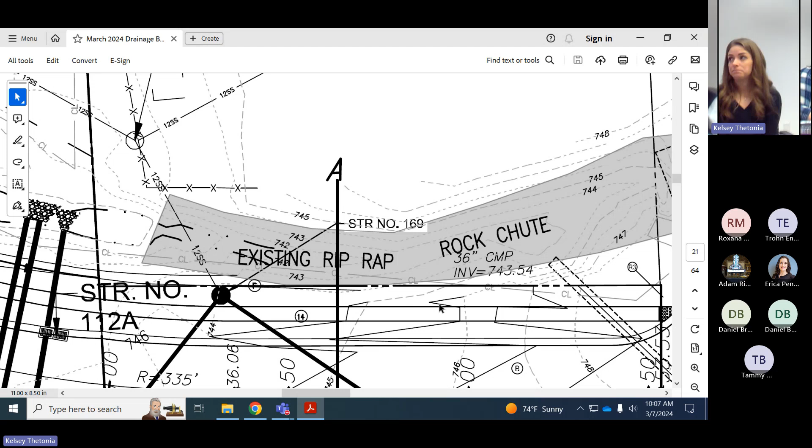Is it the floor elevation? Finished floor elevation? Oh, the house, okay, the house. And is there a basement? Oh, that's a good question. Yes, so then it would be the basement window, or the first, lowest area where water could potentially intrude, right, if they have a basement.

Well, we probably want to know what the finished floor of the basement is too, if there's a basement. Yeah, but if there's a window. Yeah, the lowest floor elevation in the house, whatever it is. Property report card's not saying basement, but we'll have you look into that. But I have one of these for your guy Carrie. Oh, sure, thank you.

All right, well, is there a second? I'll second. Do we want Donna to give us an indication if she got that motion clearly? Donna, are you able to give us a thumbs up, or maybe just indicate that you got that motion clearly enough to put in the minutes? And I sometimes go back to the recordings and we'll go through it. Yeah, you can get it from the recording, you can rewind it, I'll take care of it, edit it if Donna has questions.

Oh yeah, now we've got to take a vote. Yeah, oh yes, pardon me. Okay, Bill? Yes. Ginger? Yes. And audio is yes also.

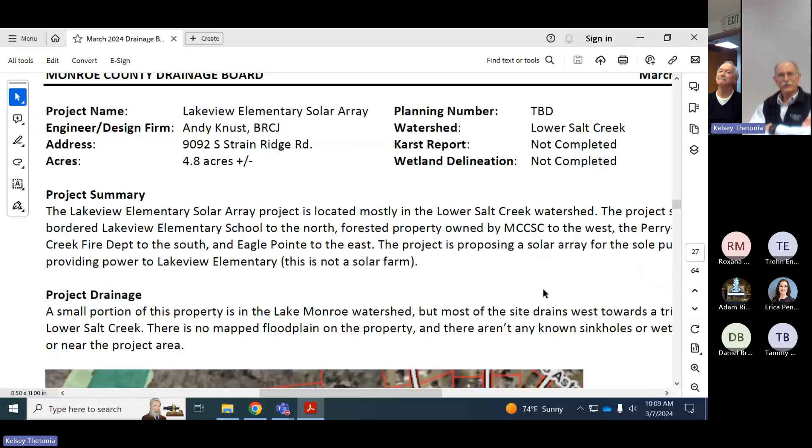All right, Andy, I'm sure you're here. I have to excuse myself, but we still have 3 voting members, so we are still okay to proceed.

Which I did look out for. Okay, so we have...

In the Lower Salt Creek watershed, Lakeview Elementary School is proposing a solar array, which will be solar panels strictly for powering the school. They will not be distributing it or selling it commercially. This is just to power the elementary school here.

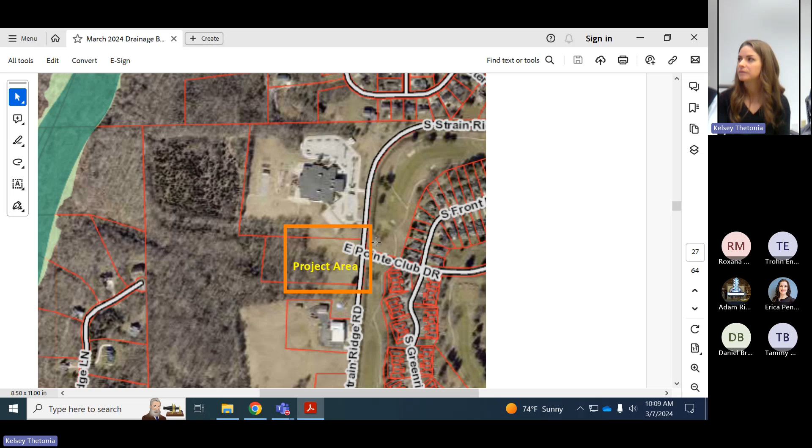Let me zoom into the map so you can get more context and see where we are. So we are down here, this is Lake Monroe. This is Eagle Pointe here, golf course, residential. This is Lakeview Elementary School, the fire department, the water tower. The school owns all this property, right? Yes.

Let me turn up the... a little better here. Okay.

So the solar array is being proposed in this area right here, and they'll run their electrical conduit to the school. But all this is owned by the school, this whole wooded area. They're asking to remove some trees along here so they can install the solar panels and not have issues with shadows.

The area itself is fairly flat. It does drop off towards the trees, and there's an existing erosional gully that has formed. Let's show on the plans—I'll pull that up—and they're gonna be mitigating that issue.

Alright, so everything in general is flowing to the west, not within the Lake Monroe watershed. It's a tributary to Salt Creek. One little corner on the east side here does drain to the Lake Monroe watershed, but most of it drains outside that watershed to the west. So it's not in a critical area; most of it is not in an eco zone.

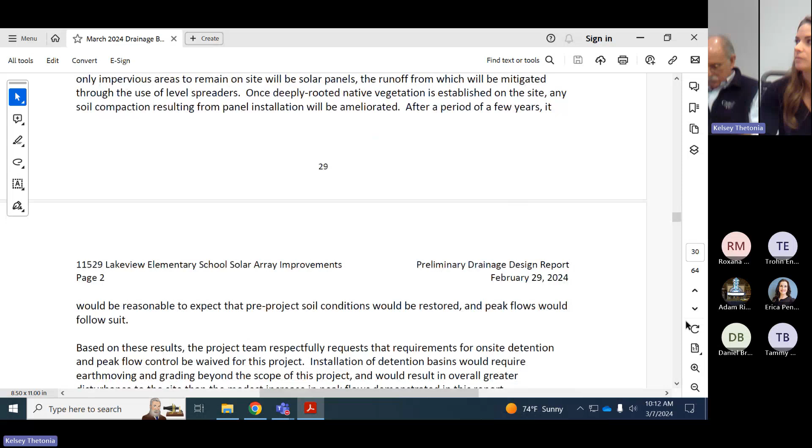Was this site in a critical basin? No, it is not. So everything—these are the drainage areas—it drains to the west here, and this is the only area in the eco zone in the Lake Monroe watershed.

Okay, alright, so I pulled up this plan page, I thought it best showed your drainage plan and what you're proposing here. So Andy, I will let you describe in detail your process for designing this, asking for the waiver. Great, thanks, Kelsey.

Yeah, so you can see in the figure there, solar panels—that's all the impervious area that we're adding to the site, basically the solar panels themselves. And they're gonna be built on driven piles, so there really won't be any excavation or earth moving on the site. They're just gonna pile these posts in the ground and build the racking for the solar panels on that. The finished condition will be the solar panels, and everything else will be revegetated with a native perennial flower kind of seed mix. So ultimately, the only impervious area we're dealing with here is the panels themselves.

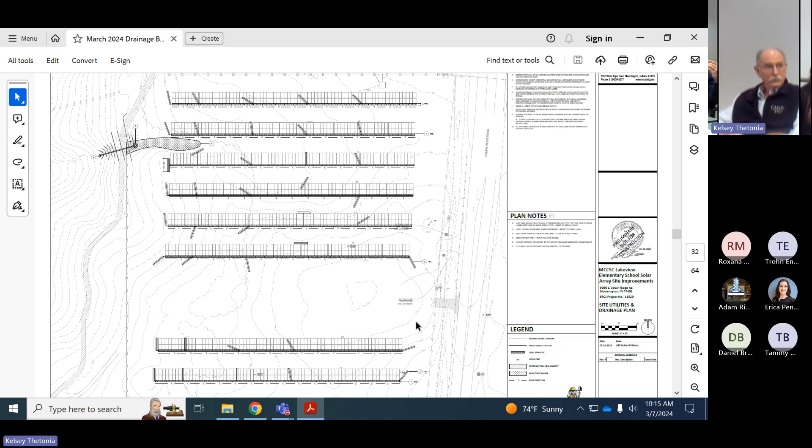One thing is ensuring that the impervious area of the solar panel is disconnected, so we're not channeling all that water into a pipe for a single point discharge, which would concentrate all that impervious area at one point. That's not what we're trying to do, so we're going to put erosion control, perforated piping with drain rock backfill at the drip edge of each panel array.

Each run of panels is oriented east-west, and the panels themselves are angled to the south to catch the optimum sun angle. They're not a rotating array, it's just fixed.

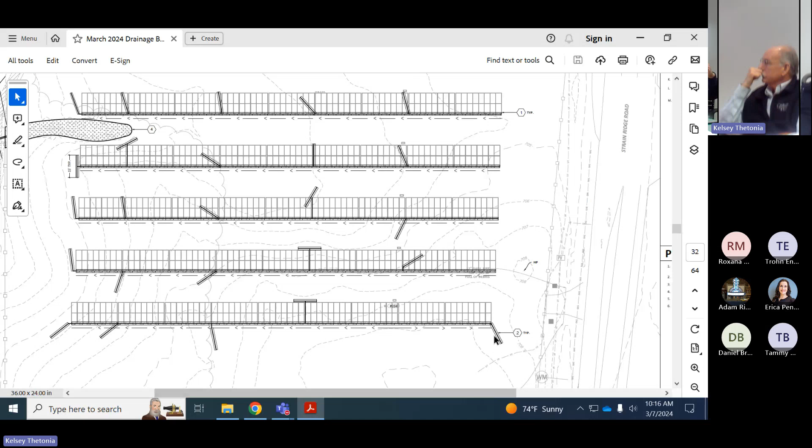All the runoff will come off the south edge of those panel runs, and we're going to collect it in a perforated pipe with gravel backfill to mitigate any erosion at that drip edge. Then we've got these little features that Kelsey is pointing to.

Those are level spreaders. After the drainage is captured in the perforated pipe, we'll run it downslope until we get to a contour, where we'll take that pipe and run it out flat along the contour so the water can exfiltrate through the perforated pipe and gravel backfill, spreading the flow back out after it's been collected. We'll do that at regular intervals, like every 2 bays of panels.

I think it's like every 60 feet or so, we'll have a level spreader to spread out that captured flow. The goal is to prevent a point discharge.

Will all the pipes be connected to the level spreaders, like the ones on the north side? Yeah, some of them are in a funny spot because the contours are, as you can tell, the slope is going in several different directions across the site. Right in that area it's sloping northward, so our thought is to capture the drip edge of the panels and then have a short run of pipe that goes under the panels and releases it into a level spreader on the north side of that panel row.

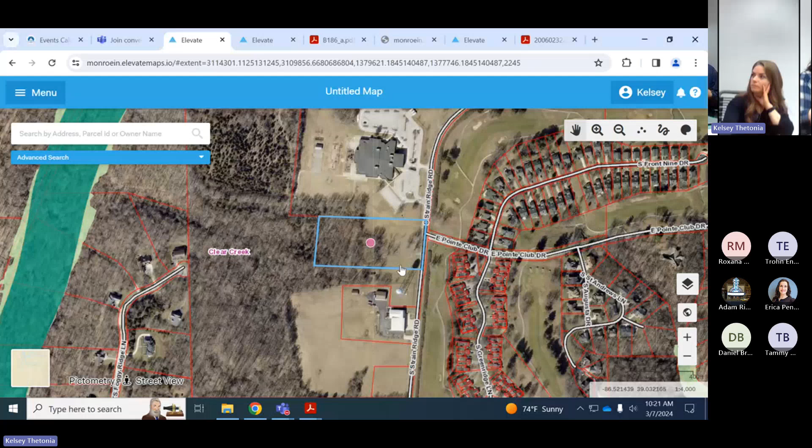And the thing is that the pre-project, before we do anything out there, our peak flow—I don't have the model results here—but the peak flow before we do anything out there is already well above the general release rate.

Of 0.5 CFS per acre for the 10-year event, 0.9 CFS per acre for the 100-year event. Those are the general release rates. Before we do anything out there, in the existing condition, we're already at twice that.

And to me it seems kind of unreasonable to expect that a project where we have very minimal impact to the existing drainage condition would need to put in detention systems to reduce the peak flow to less than half of what it is now. So that's the point of the drainage detention request.

Okay. What we're doing isn't really—I think the model results show a very small increase, I don't have the numbers right at my fingertips, but a very small increase in peak flow post-project, which we can pretty well mitigate a portion of through, as Kelsey mentioned, the erosive gully right there. In the existing condition, that's a location where some flow concentrates just from the natural contours of the land and some of the pre-project disturbance from when this was agricultural land use.

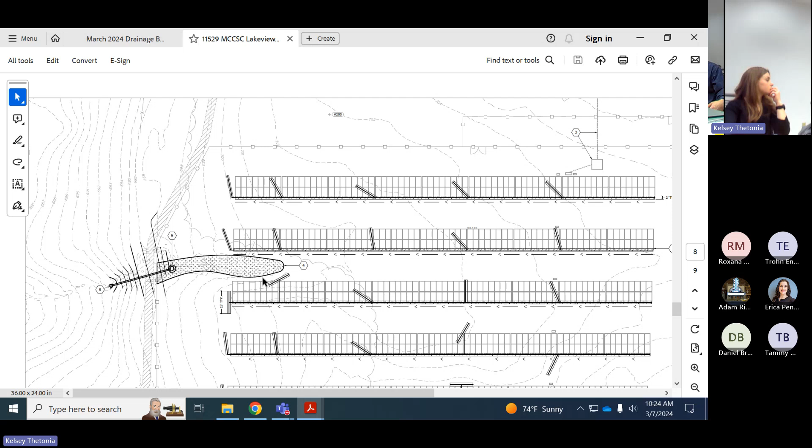Yeah, am I? It may even be sheep grazing there to manage it, so that might be shorter, I guess. Yeah, I'm seeing a pretty good tall hay field. You just mow it a couple times a year. There won't be trees, but there will be, I wonder, flowering perennials. Is it realistic to think vegetation would grow under those panels, like a grass of some kind? Would it get enough daylight? I think so, you sometimes see it. I think the panels will be up 4 or 5 feet in the air.

Well, what I'm driving at here is, I see a runoff curve number for woodlands, and it's going to change to a hayfield. Do you have those numbers in your head, Andy? I don't have them in my head, but there's not a huge change in the peak flow.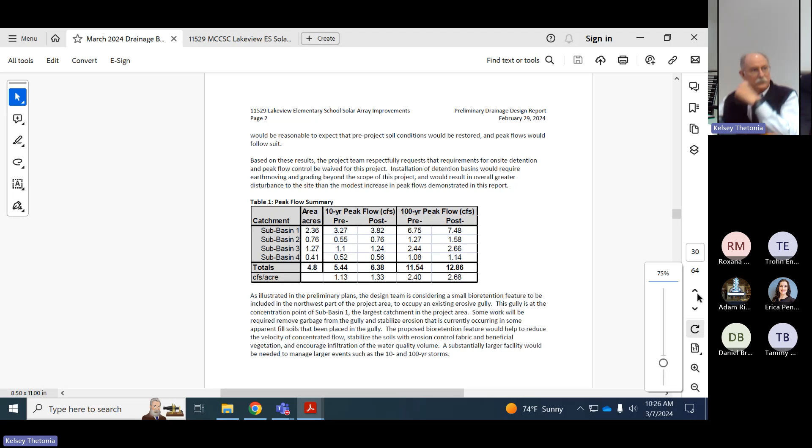And using the guidance here with the runoff curve numbers that are recommended in the technical guidance, there's a very small increase, mainly it's a result of—they said to use the next less infiltrating hydrologic soil condition. So we're going from hydrologic soil group B to hydrologic soil group C, and that accounts for really all the increase in peak flow that we get out of the model.

That's to compensate for any soil compaction that might happen during construction. There's not a huge amount of impact during construction of solar panels. They'll be out there putting in the piles and erecting the structure for the panels, so there's not a huge amount of soil impact. Once they're done, it'll be pretty well mitigated through the deep rooted native flowering perennials we're going to specify in the seed mix. So over a short period, whatever soil compaction is happening would be pretty well mitigated.

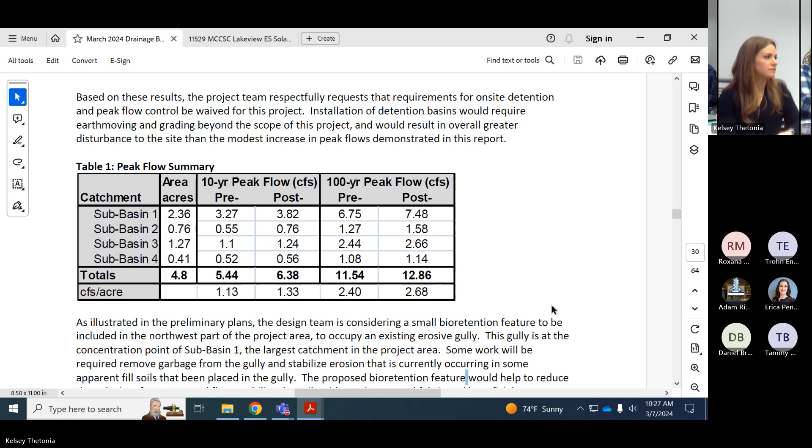And it wouldn't be continuously grazed if you were to go that option. They would have the sheep brought to the site, so it'd just be like mowing it once or twice a year. You'd have it grazed once or twice a year as well. It wouldn't be continuous. The sheep might be on the property for a week, twice a year, and then trucked off somewhere else. We haven't quite figured out how that might work yet, but it's something the school corporation is considering. Sheep, instead of mowing, sheeping, shearing.

Personally, I think that element and his system of, you call it, you refer to it, the level spreaders, yeah, the level spreaders, I think that's a great package.

I'm not relating to the ordinance particularly, but I think what I've heard in the stormwater world, when folks up in northern Indiana have hundreds or like 1,000 to 2,000 acres of a new solar farm being proposed, they're going to require detention for access roads, any new impervious surface, assuming below the solar panels is going to remain vegetated. But also, as you're asking for detention for those access roads, you would treat the panels themselves as that disconnected impervious surface and not require full detention. You wouldn't treat them as fully impervious, but have still some volume to compensate for that disconnected impervious surface. That's just the background I am seeing when we have the solar ordinance in place, that's kind of what my interpretation was.

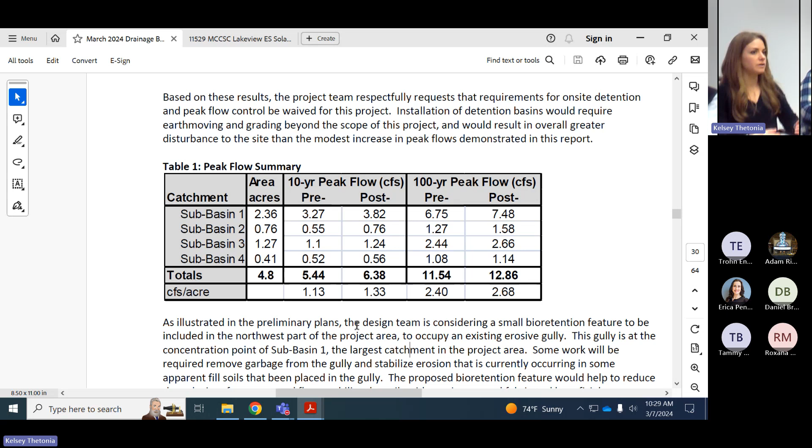But yeah, I think if it's going to remain vegetated below the panels and have that velocity issue resolved with the level spreaders, I think it'd be just a matter of maintenance in the future to make sure no erosion is occurring, and maybe we can have an O&M manual to maintain the pipes and level spreaders over time if there are issues. And managing the vegetation, making sure that it's going to remain vegetated, otherwise we would have to take it back to the board if they decide to put gravel down under the panels or something, that would be different.

So will you have an access road or is it just existing? There will be a driveway, a temporary access road during construction for the main access into the property. Okay, but that'll be removed. Okay.

Motion to approve the waiver of detention with the construction of the level spreaders and an O&M plan for continued observation of erosion and vegetative cover.

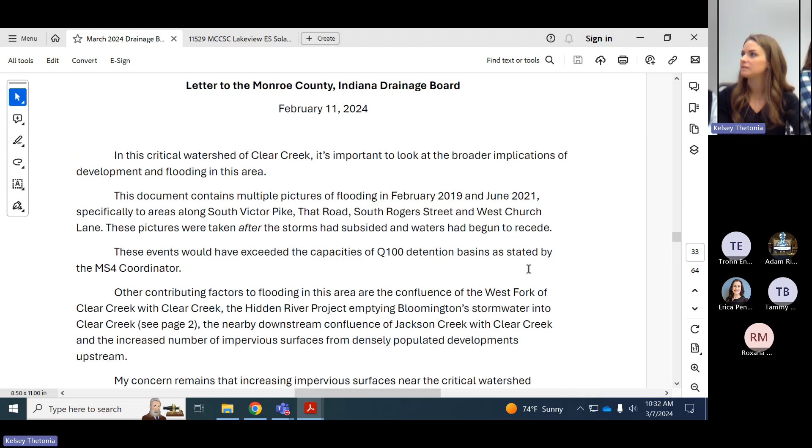I don't know if I'll be involved much in that aspect of things, but we'll definitely put some in the O&M manual. You're right, there'll be grazing, some time for the native plants to really get established, and also controlling invasives is a key part of allowing the native plants to get established. I'll follow up with you, Andy, on this. Thanks, Kelsey.

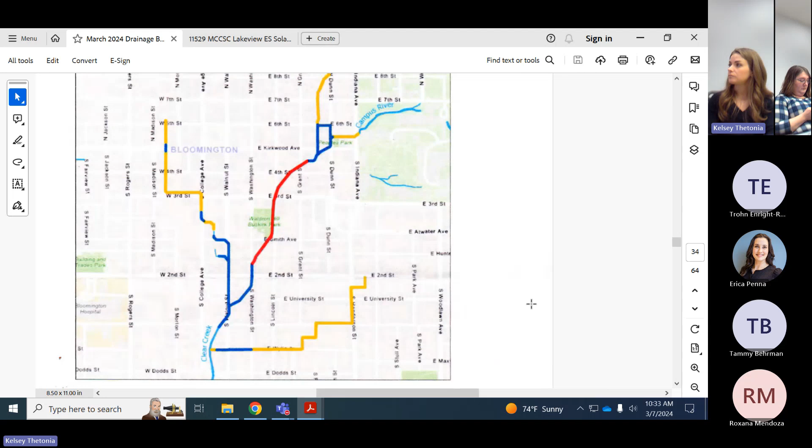I just have a quick item - in the packet I was sent some materials from the property owners in the Clear Creek watershed near the trails at Robertson Farm subdivision. We discussed their preliminary drainage plan at our February regular meeting. This was in the packet and I can resend it if you want to take a look, but I wanted to show you their description of some of the issues they see in that watershed area, and some results of the flooding from the June 2021, February 7th 2019, and June 19th 2021 events.

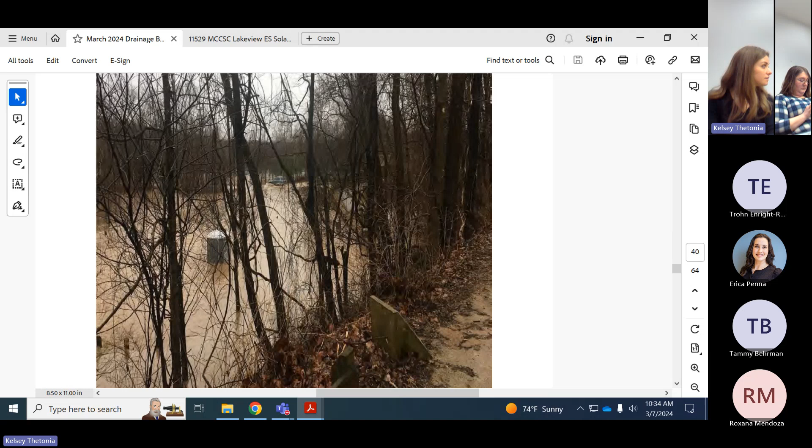They asked that I send this to you so you can see the extent of the flooding. This is the Clear Creek trailhead, it's all underwater. That's Church Lane up here. Is that not a latrine? It is. The reason we're looking at this is if the project somehow moves forward at the plan commission and comes back here, they're just wanting to provide us this additional information.

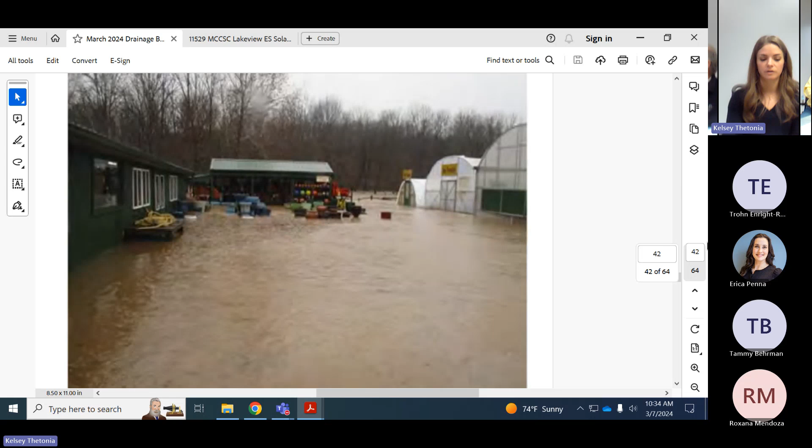I think they start with the improvements downtown. I want to get in touch with the City of Bloomington because I know they did modeling as a result of the Hidden River project, and extended it farther south into the project, not into the county. But I think that work needs to continue as well, so I want to see the results of that modeling they contracted out for the Hidden River project.

Maze Greenhouse flooded, it'll be kind of cool to see. I really like these slides where they show where the photos were taken - the intersection of Rogers Street and that road. This is the Southern Meadows subdivision over to the right. The intersection was a bit of a mess after that rain event. It's all in the floodplain for Clear Creek, so it's not surprising that it flooded, but it wasn't good.

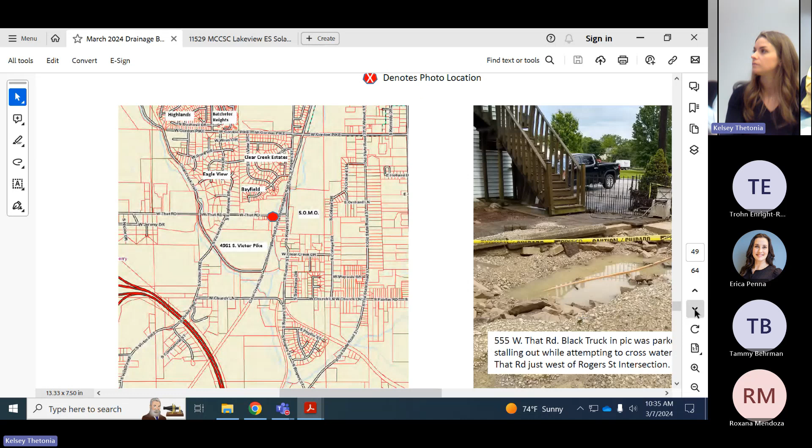Just to make a point, we allowed a couple different developments, but that bridge itself is just not to compliance, so I'll defer to Paul on that bridge and the highway department for that bridge in this area.

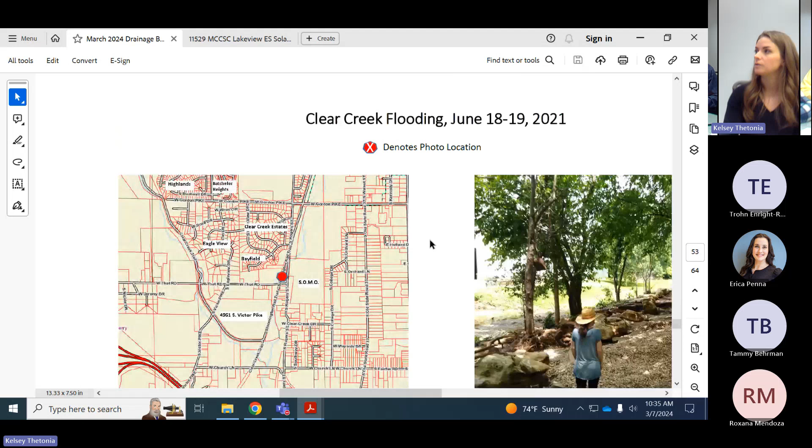What was the date of this one? These are from the 2021 event - so there's two series of photos. One was from the February 7th, 2019 flood event, then this one from June 18th through 19th, 2021. Interesting, both of them I think exceeded the 100-year. I know in June some areas got over 6 inches, it was pretty localized in some areas. The February event was particularly bad because I remember it was a thaw - there was definitely snow on the ground, soils were already saturated, and then we got a lot of rain in a short period of time. It all happened really quickly.

Do me a favor, scroll down like 7 or 8 more. Curious what the one is where you see 'road closed'.

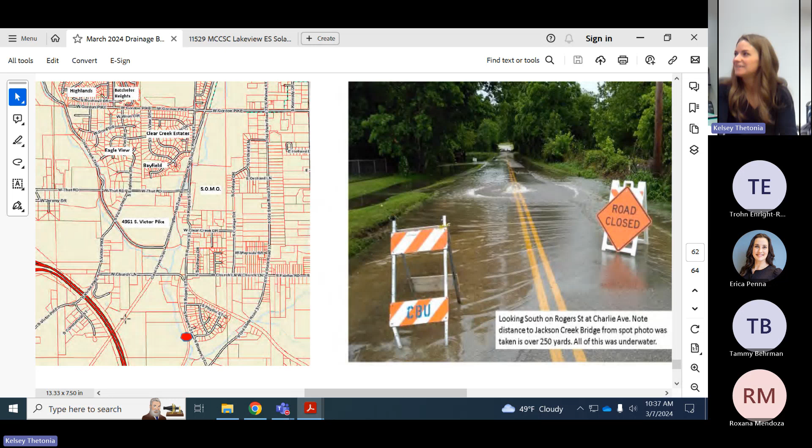Oh, it's a car. So it was a devastating event. The floodwaters came up quickly, receded quickly, but caused a lot of damage in the process.

So I wanted to show you these pictures sent from the property owners, as we're looking at development in these areas. Of course, the Trails at Robertson Farm subdivision, if approved by Plan Commission, will absolutely see that final drainage plan review to ensure it meets our standards and have a final say in its approval.

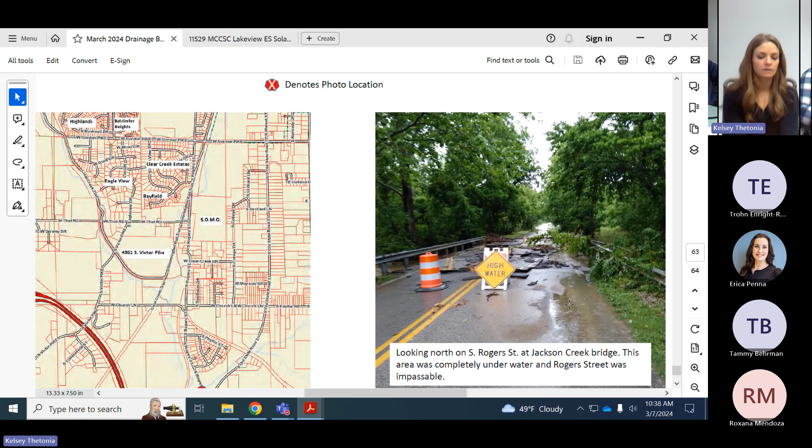Is there anything going on to try and promote reduction of impervious surfaces, like any places where there are houses in disarray that could be removed and made pervious again? I mean, I don't know—is there anything?

A property buyout program would be desirable. Yeah, it's just a lot of work on our end. Did the emergency managers end up putting that into the last update? We probably could move forward with some of that property buyout type work. Yeah, I think so.

In the Cave Creek, Sinking Creek, and Clear Creek watersheds, we have a certain number of properties in that multi-hazard mitigation plan. It's in the plan, and I made sure I talked to Manuela and Christopher Burke, who's writing it for the county, to make sure we had enough properties in there to do buyout. And we should reignite that conversation.

Yeah, there's definitely at least 3 or 4 that would be prime candidates. There are some FEMA grants available for these. The Cassidys have actually purchased some properties in this area, hoping the county will buy them, because they don't want anyone else buying homes right here.

Which one did Randy elevate? There's one that was elevated—I think this parcel here. That went through BZA after the fact.

I did see that webinar, if you want—on Atlas 15. I can send you all a copy of it too, but it was dated wrong. It was for the Thursday, not the Tuesday—for some reason it was dated wrong. I emailed her and said, wait, this says this, but you put it on my calendar for this, so which is it?